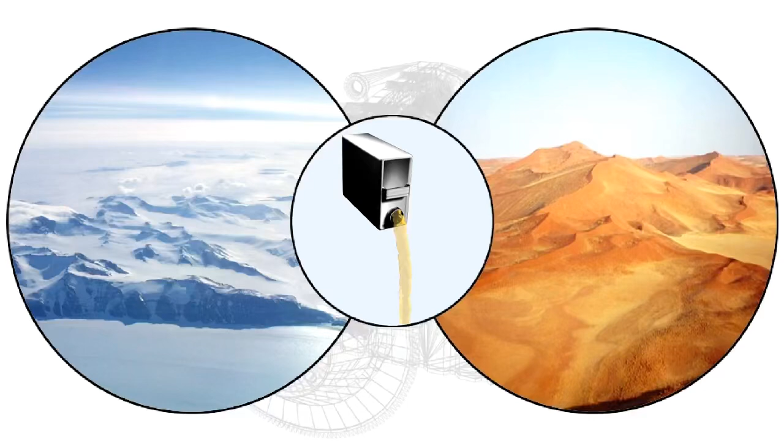The engine's operating temperature will vary considerably, from the time when it is started from cold to when it's been running at high power for long periods of time. The oil's viscosity must stay within required limits to do its job, and the range of temperatures within which it can safely do this is called its viscosity index.

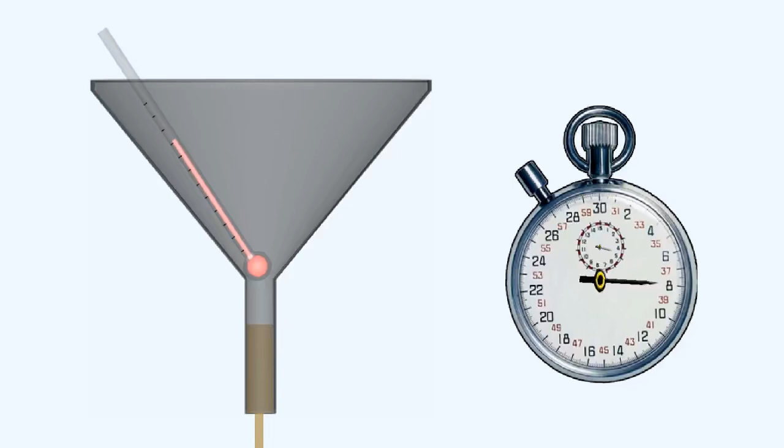There are various standards employed to determine the viscosity or thickness of oils. They all provide a datum by which differing oils can be compared. Obtaining these standards requires that we measure the time taken for a fixed quantity of oil at a given temperature to flow through an orifice or jet of a given size.

There are two standards generally employed in aviation to indicate the viscosity of oils. These are the Society of Automotive Engineers, SAE, and the Commercial Aviation grading systems. Both systems use numbers to indicate the viscosity or the grade. The lower the viscosity number, the thinner the oil.

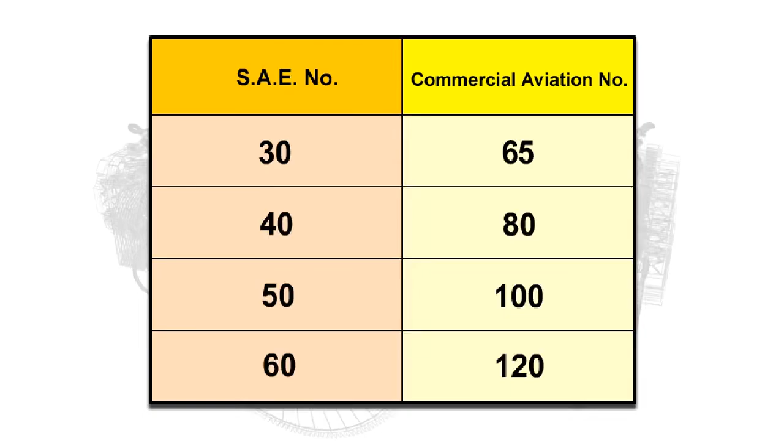From this diagram, it can be seen that the SAE number is generally half that of the commercial aviation system. Lighter loaded engines use a low viscosity or thin oil, whereas higher powered engines with higher loading would require a high viscosity or thick oil.

As previously stated, the air temperature in which the engine operates also has an influence on the viscosity of the oil selected for use in that engine. For example, a light aircraft operating within the United Kingdom during the winter may use an 80 grade oil, and in summer it would use a 100 grade, the choice of grade being dependent on the average ambient temperature.

The use of too high a viscosity oil at too low a temperature can cause engine starting problems. Oils which have two viscosity values can be used to minimize starting problems. For instance, SAE 15W50 - the W indicates that the oil is suitable for use in winter in cold climates.

Oils with two viscosity values are called multigrade oils. They will have the characteristics of low viscosity at low temperatures and high viscosity at high temperatures.

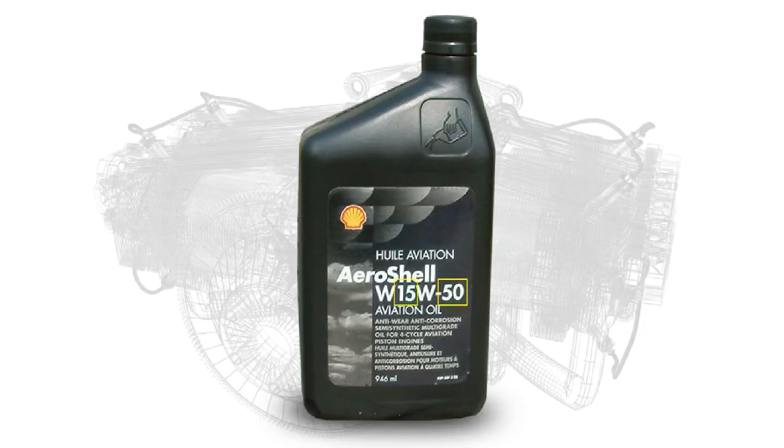The type of oil used in aircraft piston engines is normally mineral-based. If the oil contains no additives, it's called a straight oil. To meet certain requirements of engine operation, additives can be mixed with the oil. These additives can take the form of antioxidants, dispersants, and oiliness agents.

Oils which contain additives are called compound oils. Straight and compound oils are both identified by the viscosity numbering system, but a compound oil will have additional lettering as well as the number.

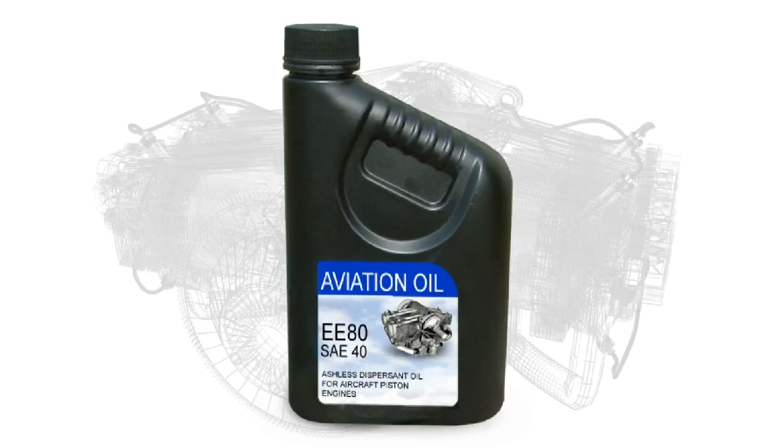Thus, a bottle or can containing a straight oil with a viscosity of 100 would have only the number 100 marked on it. But a compound oil of the same viscosity may be marked AD100, EE100, or W100. The actual lettering used varies with the oil's manufacturer.

The letters AD, EE, and W all denote that the oil is an ashless dispersant oil. The W on the AeroShell W100 oil, which is produced by Shell International, should not be confused with the W used in the grading system.

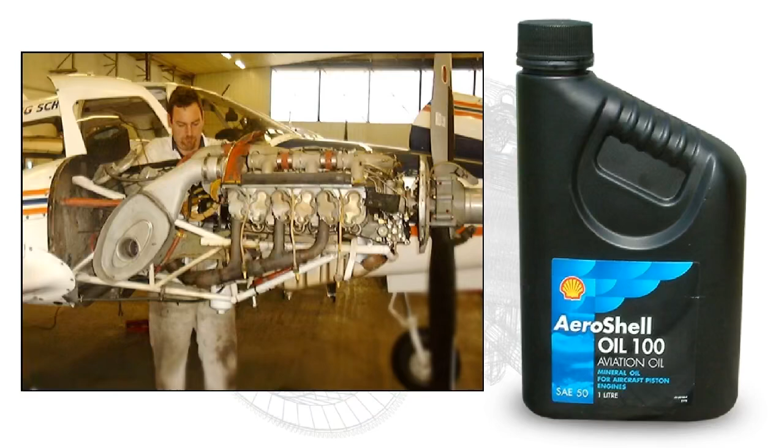Generally, straight oil is only used when running in new engines, or for specific engine installations. As we said earlier, piston engines normally use mineral-based oils. However, some engine manufacturers have trialled and approved the use of semi-synthetic oils.

Indications of oil pressure and temperature give the pilot a good idea of the mechanical integrity of the engine. Of course, the pilot must then interpret these indications correctly.

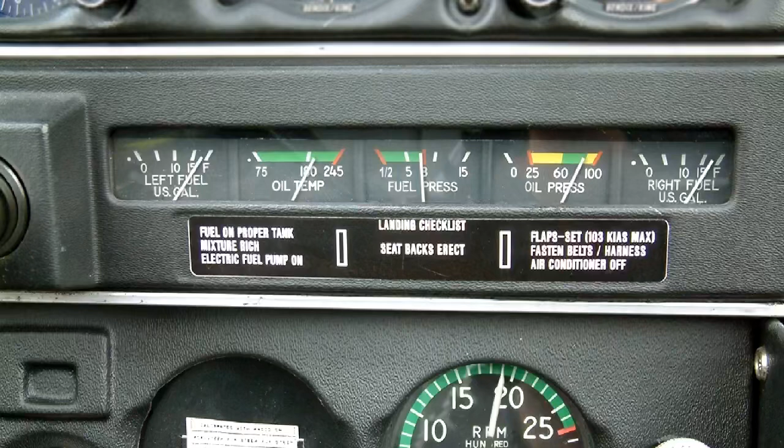Aircraft which use radial and inverted engines require the pilot to have knowledge of the lubrication system even before he starts the engines. Both of these types of engines can suffer from a problem called hydraulicking.

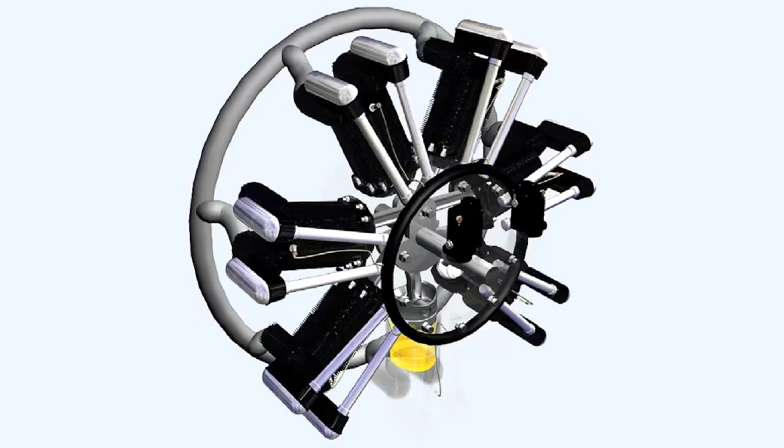In radial and inverted engines, oil may accumulate in the cylinders at the bottom of the engine, between the piston and cylinder head after shutdown. Damage to the engine could occur on startup, as the piston, on the compression stroke, traps the incompressible oil between itself and the cylinder head.

Prior to starting, these engines should be rotated through a number of cycles by use of the propeller, to ensure no hydraulic lock has occurred. You must, of course, ensure that the magnetos are off before turning the engine over.

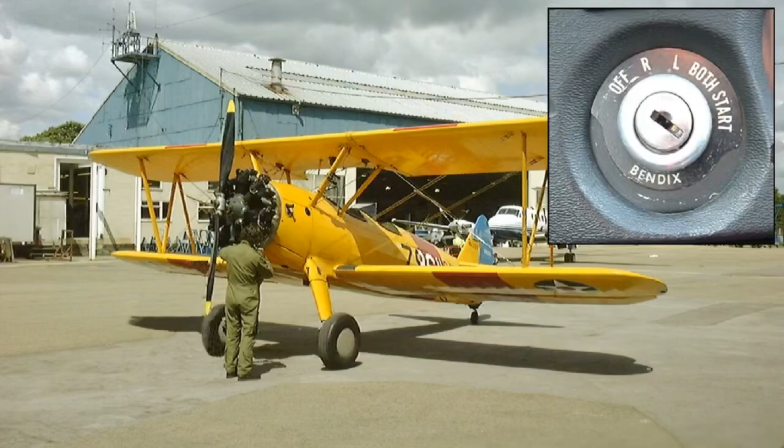After starting an aircraft piston engine, positive engine oil pressure should be indicated within a specified time. The Piper Warrior checklist stipulates 30 seconds. If oil pressure is not indicated within the specified time, the engine must be shut down immediately and the problem investigated.

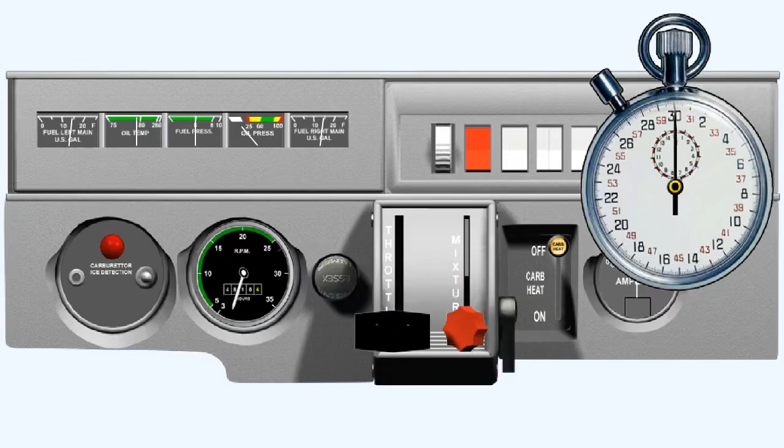If the engine is started from cold, initially the oil pressure could appear to be excessively high. This indication can be considered to be normal, as long as the pressure drops to within its normal range as the engine warms up. Correct engine operating pressures and temperatures are dependent on each other.

As was stated before, as long as the oil pressure drops to normal as the engine warms up, this situation can be considered acceptable. However, if the pressure rises to dangerously high values, the engine must be stopped to prevent damage. The oil pressure should be within its operating range at the correct operating temperature.

High oil temperature could cause the pressure indication to be low. If the oil pressure is too low, apparently because of associated high oil temperature, then this is probably due to the viscosity of the oil dropping below the point where the oil pressure relief valve can cope with the situation.

If the engine is fitted with oil cooler shutters, they can be opened in an attempt to lower the oil temperature. Alternatively, if oil cooler shutters are not an option, consideration should be given to either reducing engine power, lowering the nose to increase airspeed, or even making the mixture richer. Any or all of these actions can be used to cool the engine and thus cool the oil, bringing its viscosity back up to the point where the system can cope.

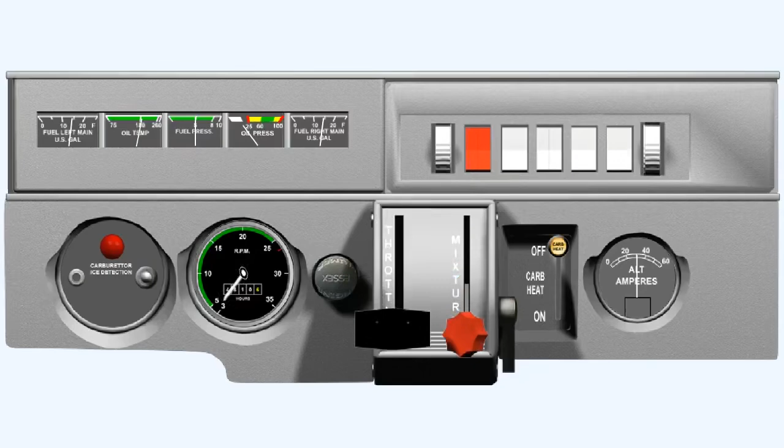If the minimum oil pressure cannot be maintained, then the engine must be stopped to prevent damage being caused to some components through lack of lubrication. Fluctuations in pressure could be the result of either low oil levels or system faults.

Small fluctuations of the oil pressure gauge needle, either side of the desired pressure, may be indicative of a sticking pressure relief valve. This would cause the pressure to first build up beyond the optimum level, then subsequently, when the pressure reached a point high enough to overcome the stiction of the valve, it would open, dropping the pressure momentarily below the correct level. Then the cycle would start again.

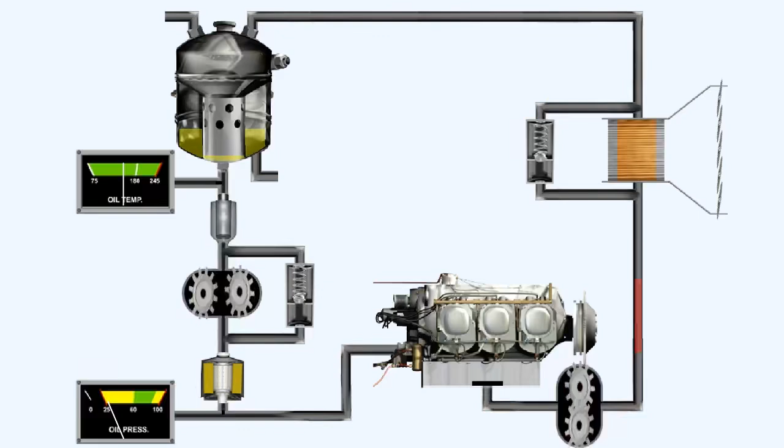Large fluctuations of the oil pressure gauge needle, on the other hand, will probably be caused by insufficient oil in the system. The engine may have been leaking oil, and eventually the level will drop to a point where the pressure pump cannot sustain its output.

Then the pressure will drop momentarily until the pump can get some more oil, when the pressure will rise again, if only for a moment. If the minimum oil pressure cannot be maintained, then the engine must be stopped to prevent damage.

If the oil pressure falls suddenly to zero, then perhaps the reasons may be a bit academic. After all, if the minimum oil pressure cannot be maintained, then the engine must be stopped to prevent damage, and there is probably not a lot you can do about the problem. Nevertheless, the probable cause is either failure of the pressure pump or a total loss of oil.

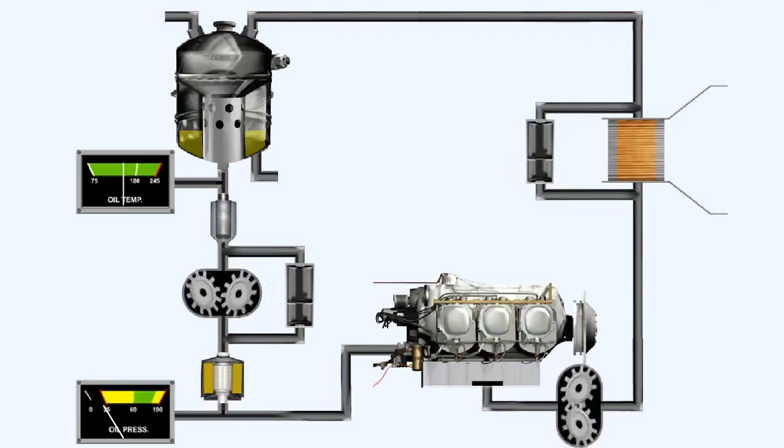Coring is a condition which can occur in engines which are capable of developing very high power outputs. During the climb to height, inexperienced operators would sometimes tend to set the oil cooler shutters in a fairly open position, to ensure that the oil temperature stayed cooler rather than hotter.

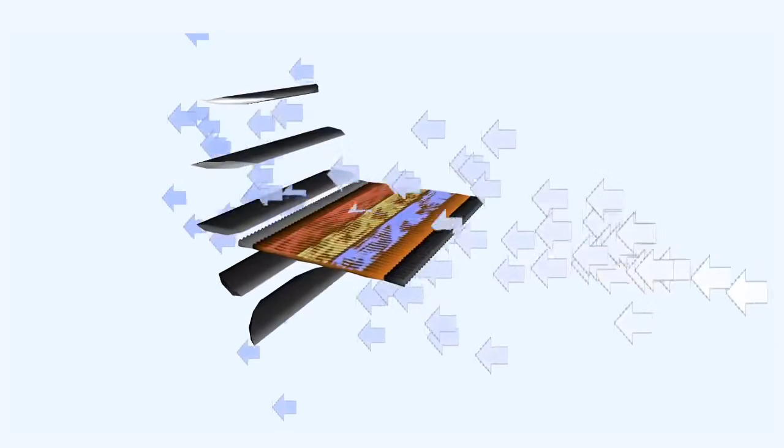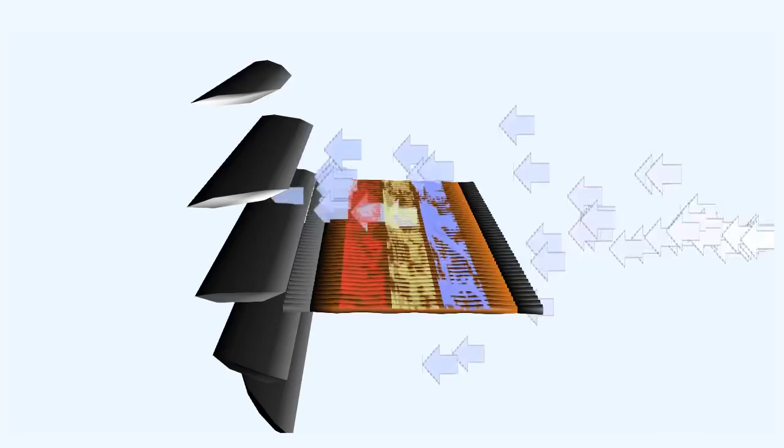Unfortunately, if the ambient temperature fell faster than anticipated during the climb, the oil temperature would fall lower and lower. The viscosity of the oil flowing through the oil cooler would rise, and eventually the oil would become so thick that in the front of the cooler the oil would stop flowing altogether. To the rear of the cooler, some oil would still flow, but being insulated from the cooling air by more and more stationary cold oil, it would get hotter and hotter.

The instinctive reaction of the inexperienced operator to the indications would be to open the oil cooler shutters fully. But this would just cause the oil temperature to rise faster by thickening the insulating layer of cold oil in the front of the oil cooler.

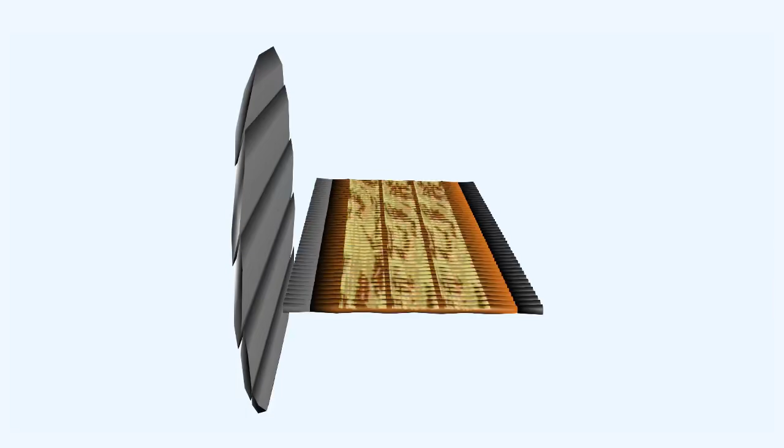The correct actions to take would be to close the oil cooler shutters. If this is done soon enough, the heat of the oil in the core is passed outwards to oil in adjacent tubes in the matrix, lowering the viscosity of the oil sufficiently to start flow through the rest of the cooler, increasing the volume flow and thus eventually dropping the overall temperature of the oil contents.

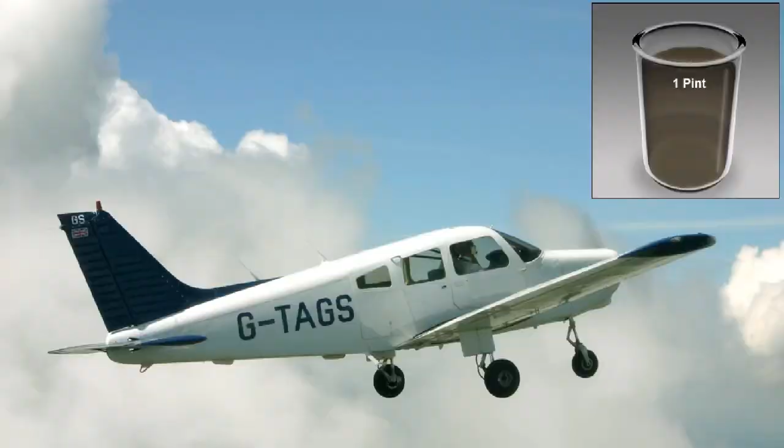It should be appreciated that as the oil is used to lubricate the moving parts of the engine, it will come in contact with the combustion gases. The inlet and exhaust valves and piston rings do not have a 100% seal, and as a result some oil will be burnt, and the engine will therefore have an oil consumption rate.

Oil consumption varies between engines. A typical light aircraft engine would use around 1 pint per hour, although some engine manufacturers consider 2 pints per hour to be acceptable. A consumption rate greater than the recommended limit may be an indication of engine wear.

The oil contents should preferably be checked prior to flight. However, if the engine has a dry sump lubricating system, the oil tank contents should be checked immediately after the engine has stopped, realistically within a few minutes of shutdown. This ensures that the contents are recorded accurately before the oil migrates, under gravity, down into the engine sump.

Large piston engines have oil tanks fitted with a check valve, usually situated underneath the oil tank, which is closed under spring pressure or alternatively by an electrically operated actuator on engine shutdown. The closing of the check valve prevents oil migration into the sump.

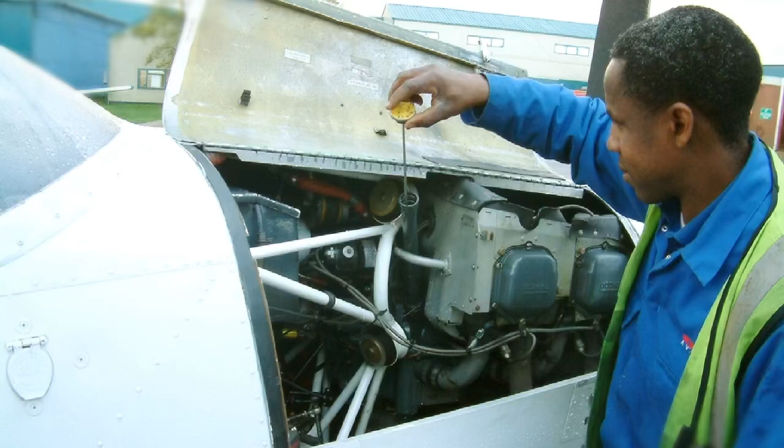The wet sump system requires the opposite treatment. A period of at least 15 to 20 minutes should have elapsed after engine shutdown before the contents are checked by using the dipstick in the engine sump. This concludes the lesson on lubrication.